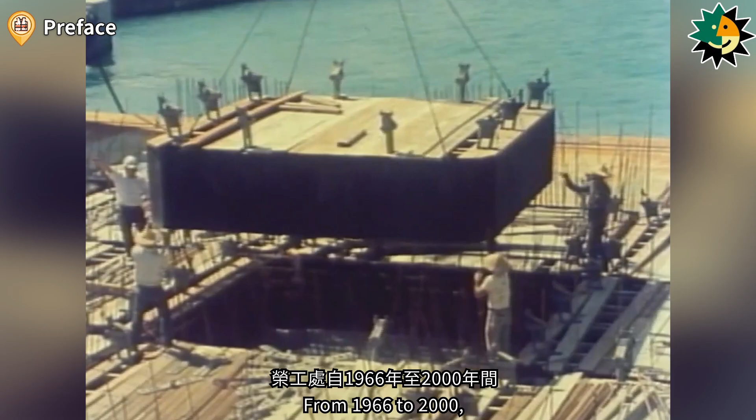From 1966 to 2000, the RSEA engineering agency competed fiercely in the global construction market against contractors from around the world, securing overseas projects across Southeast Asia, Africa, the Middle East, the Americas, the Pacific Islands, and the Indian Ocean region. The previous first episode and the second episode introduced projects in 6 Southeast Asian countries, while the third episode covered projects in the Middle East, specifically in Saudi Arabia, Jordan, and Bahrain.

This is the fourth episode, which continues with the introduction of projects in various regions, including Diego Garcia in the Indian Ocean, Guam in the Pacific Islands, the Central African Republic, Egypt, Liberia, and Guinea-Bissau in Africa, Atlanta and Vancouver in North America, Costa Rica in Central and South America, as well as the Solomon Islands and Tuvalu in the South Pacific.

Guam, located in the western Pacific Ocean, is one of the 5 unincorporated territories of the United States. It has an area of 544 square kilometers and a population of approximately 161,785. From 1970 to 1980, the RSEA Engineering Agency began expanding its operations to Guam, starting with the construction of phases 2 and 3 of the U.S. Naval Base housing project. Other scattered works included housing projects at the U.S. Naval Air Station, facility restoration at the Naval Base, facility restoration at the Air Force Base, and the reconstruction of the Naval Base transmitter building.

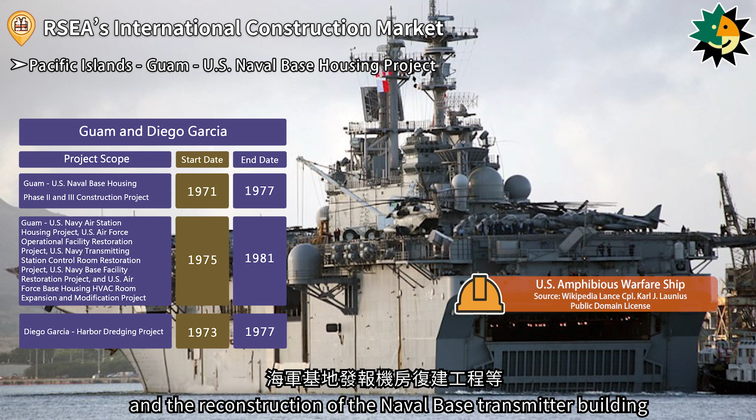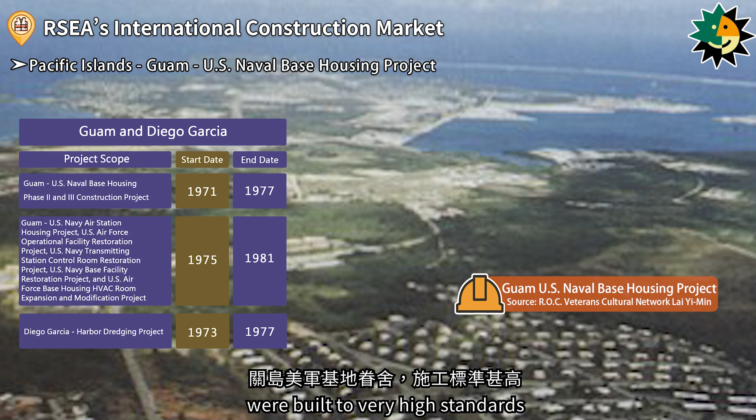The U.S. Naval Base housing project, in its second and third phases, involves the construction of a total of 530 housing units. The family housing units at the U.S. military base in Guam were built to very high standards. Each unit was equipped with central air conditioning, a garage, as well as appliances such as a dishwasher and a garbage disposal. The RSEA Engineering Agency undertook both the design and construction as a turnkey project.

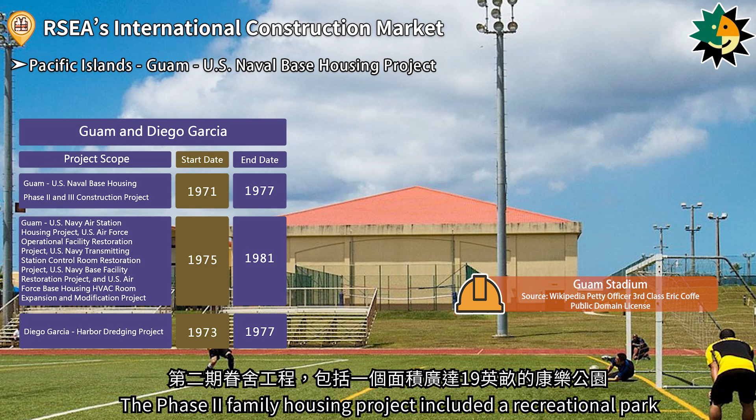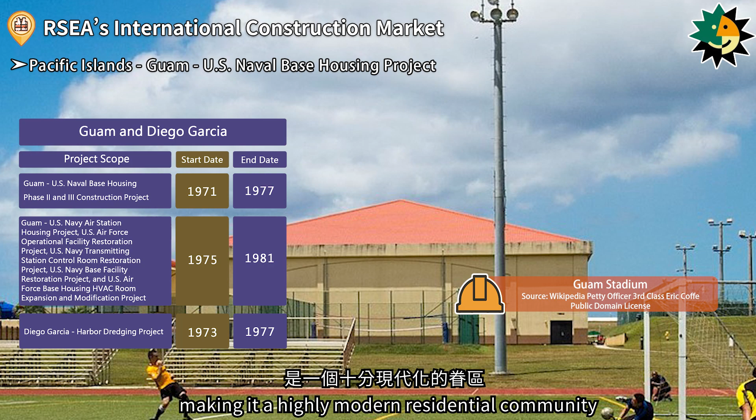The Phase 2 family housing project included a recreational park covering an area of 19 acres. The park featured sports courts, a playground, and picnic areas, making it a highly modern residential community. In addition, the church project in Guam was honored with a Best Design Award. The RSEA Engineering Agency operated in the Guam region for a total of 10 years, but eventually withdrew due to limited business development.

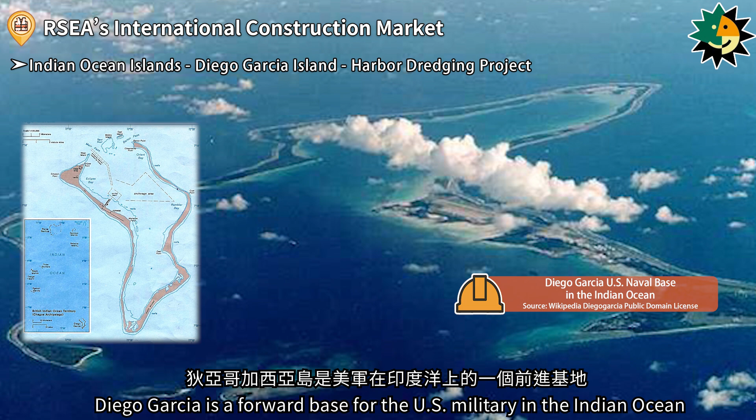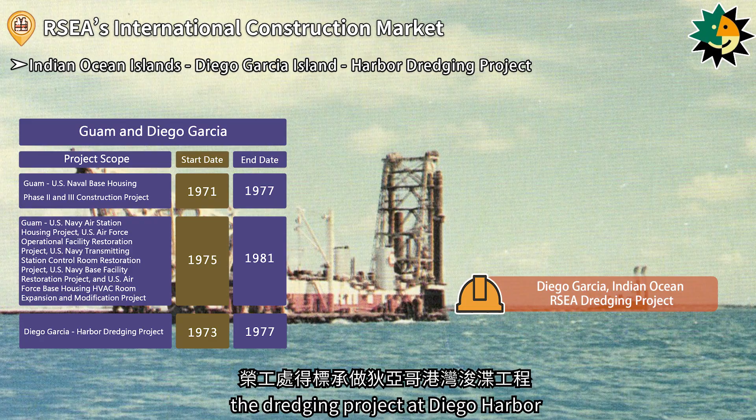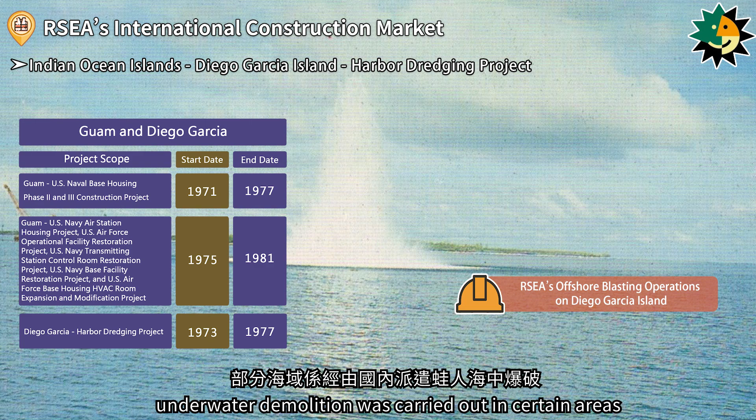Diego Garcia is a forward base for the U.S. military in the Indian Ocean. From 1973 to 1977, the RSEA Engineering Agency was awarded the contract for the dredging project at Diego Harbor. The seabed of Diego Garcia consists entirely of extremely hard coral reefs, making it a nemesis for grab dredgers. During construction, underwater demolition was carried out in certain areas by frogmen dispatched from Taiwan, causing the coral to collapse naturally and achieve the desired dredging effect.

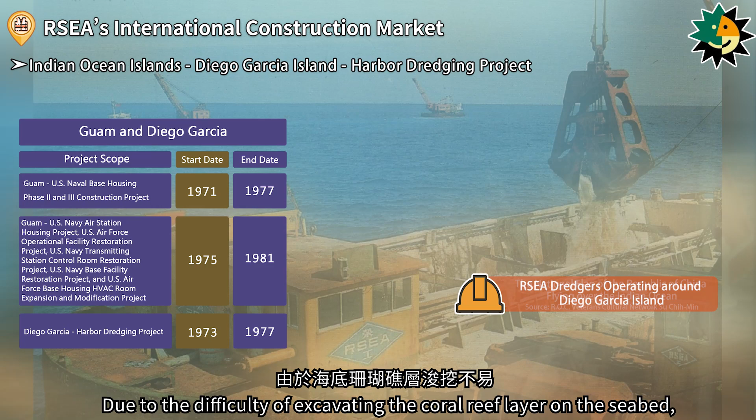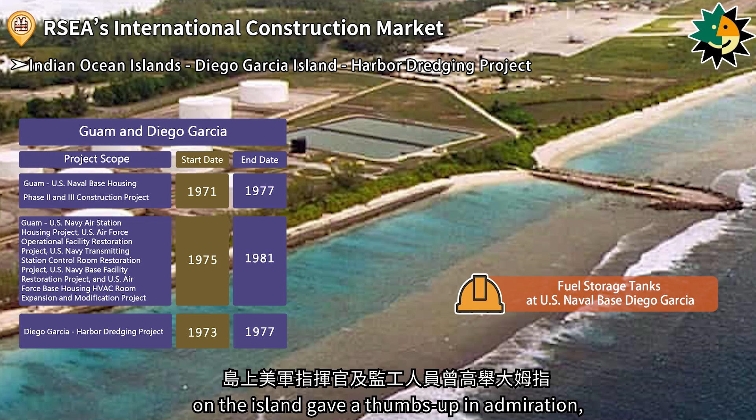The dredging project at Diego Garcia Harbor was carried out in 6 phases. Among them, the first phase was the most challenging due to the difficulty of excavating the coral reef layer on the seabed. The RSEA Engineering Agency's staff persevered under harsh conditions and ultimately completed the project on schedule. When all 6 phases of the project were completed, the U.S. military commanders and supervising personnel on the island gave a thumbs up in admiration, praising the engineering personnel from the Republic of China as truly outstanding.

The Central African Republic lies between 3 and 11 degrees north latitude, situated in the heart of the African continent. It is a vital corridor for north-south and east-west movement, holding significant strategic importance. The country has a total area of 625,900 square kilometers and a population of approximately 4,422,000. To the northeast, it borders Sudan, to the east, South Sudan, to the south, the Democratic Republic of the Congo, to the southwest, the Republic of the Congo, to the west, Cameroon, and to the north, Chad. Located about 1,000 kilometers from the nearest coastline, it is a landlocked country with no access to the sea.

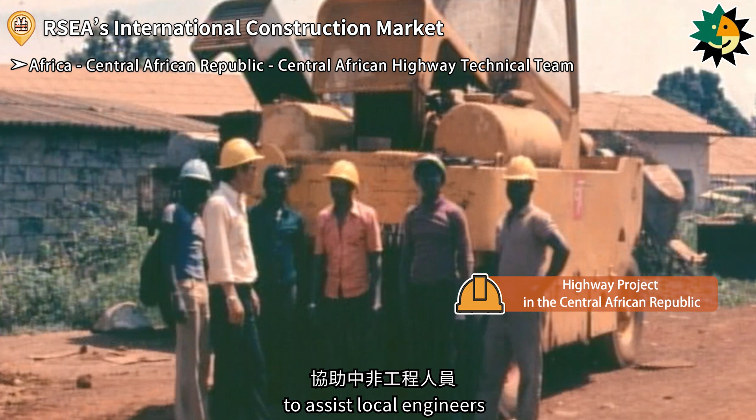In 1970, the RSEA Engineering Agency entered Africa for the first time by dispatching a Central African Highway technical team to assist local engineers in road construction and training. Their work included guiding highway construction operations, assisting in the maintenance and repair of related construction machinery, and training personnel in highway engineering.

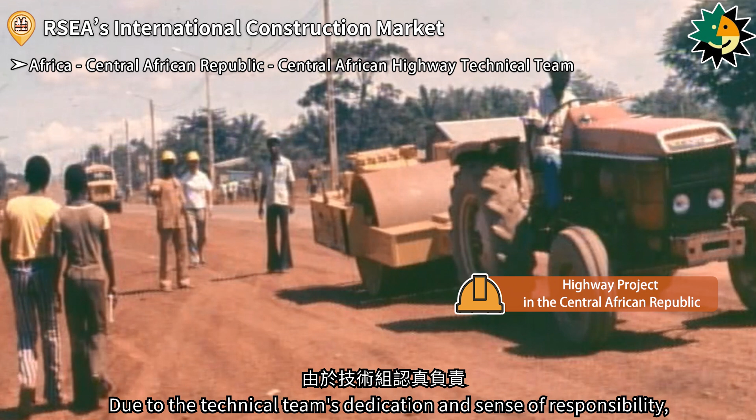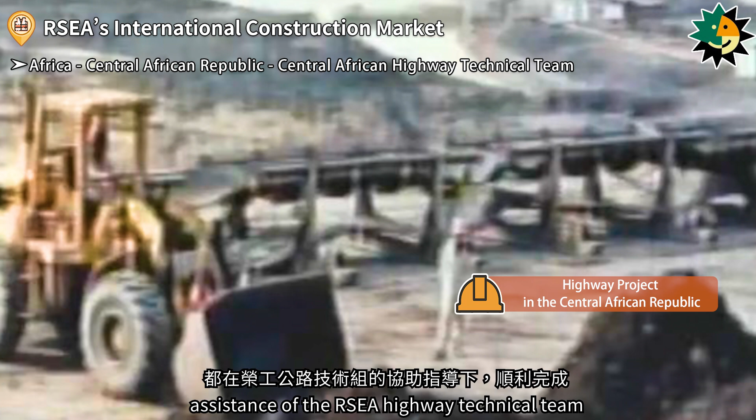Due to the technical team's dedication and sense of responsibility, they were warmly welcomed by the host country. Many road construction projects were successfully completed under the guidance and assistance of the RSEA Engineering Agency Highway Technical Team. The technical team remained in service until 1976, when diplomatic ties between the two countries were severed, prompting their withdrawal. Over 5.5 years of service, the bond of friendship between the two peoples was deeply rooted and endures to this day, thanks to the RSEA Engineering Agency's technical assistance.

The Arab Republic of Egypt is commonly known as Egypt. Ancient Egypt was one of the world's earliest civilizations. The country has a total area of 1,001,450 square kilometers, and as of February 2020, its population surpassed 100 million. Egypt is considered a middle power country, with key industries such as tourism, agriculture, manufacturing, and services contributing almost equally to its development. Egypt's Suez Canal serves as a bridge between Asia and Africa, and it holds significant influence across the Mediterranean, the Middle East, and regions of Islamic faith.

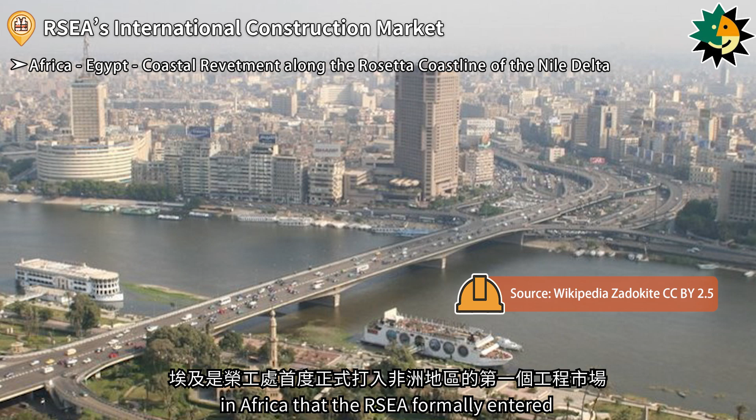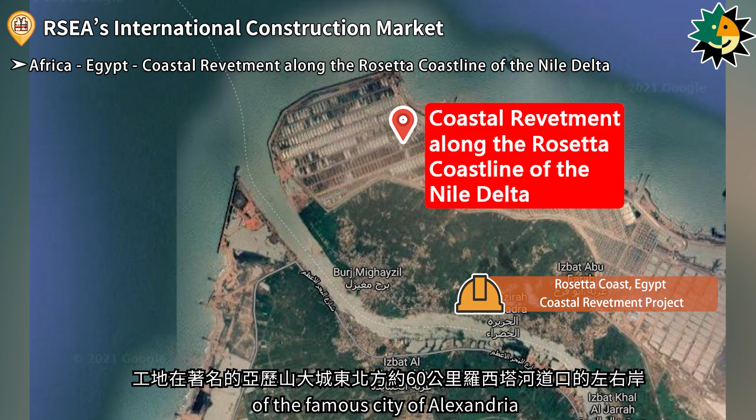Egypt was the first engineering market in Africa that the RSEA Engineering Agency formally entered. In 1986, the RSEA Engineering Agency won the contract to undertake the coastal revetment along the Rosetta coastline of the Nile Delta. The construction site was located on both banks of the Rosetta branch mouth, about 60 kilometers northeast of the famous city of Alexandria. Revetments were built to protect against wave erosion, 1.5 kilometers on the left bank and 3.8 kilometers on the right bank, totaling 5.3 kilometers in length.

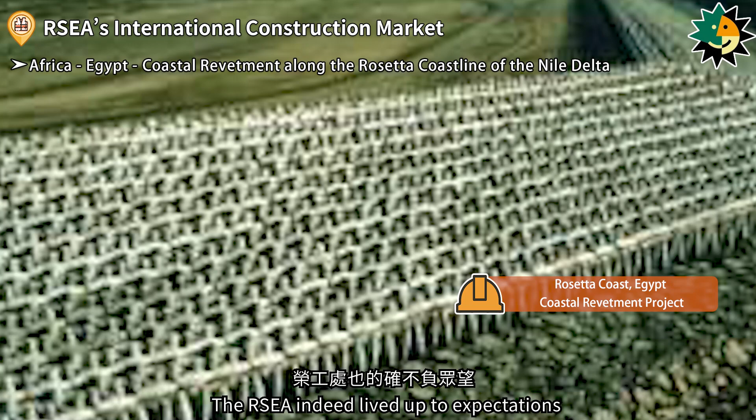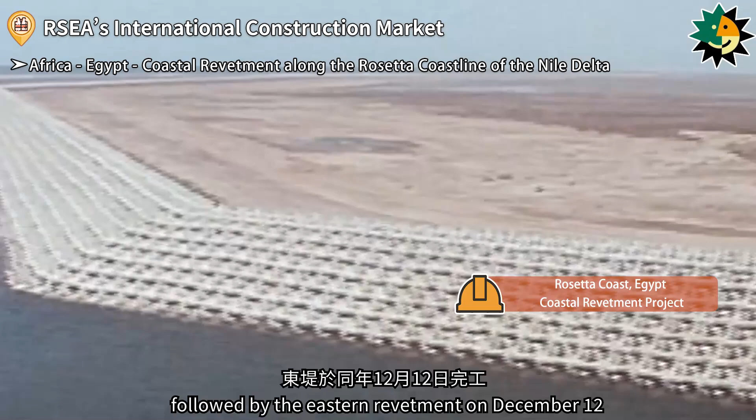After the RSEA Engineering Agency was awarded the contract, the project drew significant attention from international coastal protection experts representing the World Bank, the United Nations, the United States, France, the Netherlands, Denmark, and Egypt. The RSEA Engineering Agency indeed lived up to expectations, not only successfully completing a project that safeguarded the lives, property, and ecological resources of a large portion of the Egyptian population, but also opening a channel of diplomatic engagement between the Republic of China and a country with which it had no formal diplomatic ties, making a significant contribution to citizen diplomacy. The Rosetta Coastal Protection Project officially commenced at the end of March 1986. The western revetment was completed first in September 1990, followed by the eastern revetment on December 12 of the same year, more than 3 months ahead of the contractual schedule.

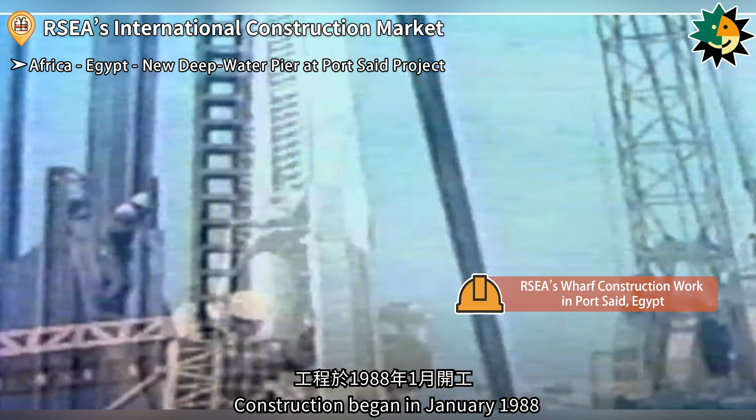In 1987, the RSEA Engineering Agency was subsequently awarded the contract for the construction of a new deep-water pier at Port Said. Located on the western bank of the Suez Canal, Port Said is a commercial port on the Mediterranean coast of Egypt. The project involved the construction of a pile-supported deep-water pier measuring 250 meters in length and 34.5 meters in width. Construction began in January 1988 and was completed on June 3, 1990.

Egypt and Taiwan have no formal diplomatic relations. In 1989, then Kuomintang Secretary General James Soong and his wife visited Egypt. Through arrangements made by the RSEA Engineering Agency, the Egyptian Minister of Public Works privately hosted a banquet in their honor, joined by the Ministers of Agriculture and Interior. The gathering was warm and cordial, with both hosts and guests enjoying the occasion.

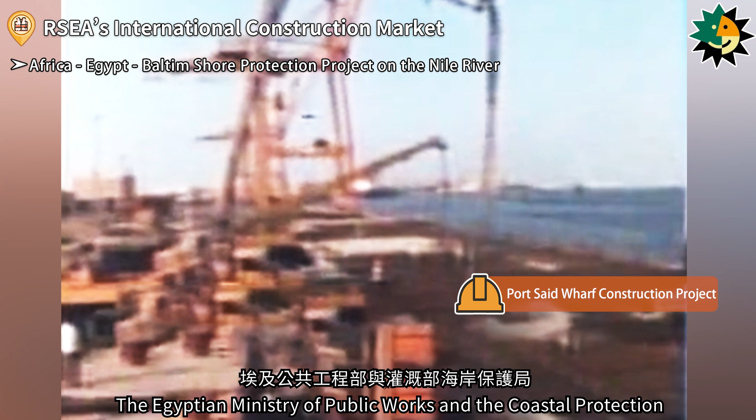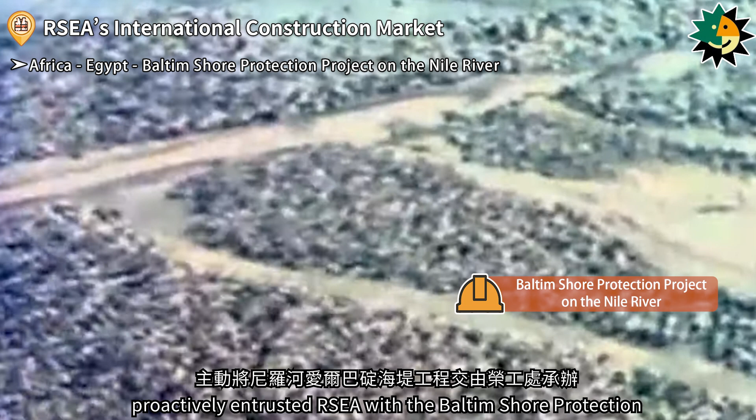The Egyptian Ministry of Public Works and the Coastal Protection Authority under the Ministry of Irrigation, in light of RSEA Engineering Agency's performance on the Rosetta Seawall and Port Said project, proactively entrusted RSEA Engineering Agency with the Baltim Shore Protection Project on the Nile River. This was a contract awarded by the Egyptian government, earned entirely through engineering credibility and a guarantee of quality.

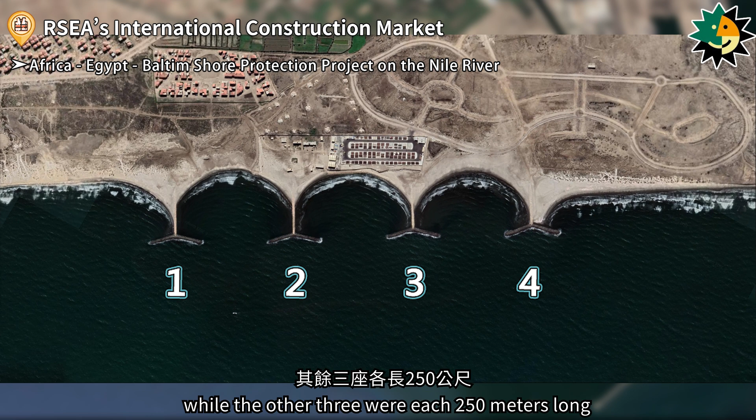The Baltim Shore Protection Project was located in the central area of the Nile River Delta's lower reaches. The construction included a new seawall measuring 1,100 meters in length. Approximately 200 meters offshore, 4 isolated offshore breakwaters were built. One of them was 350 meters long, while the other 3 were each 250 meters long. The base width of each breakwater, including the toe of the slope, was 34 meters, and their height ranged from approximately 4.5 to 5 meters above the seabed.

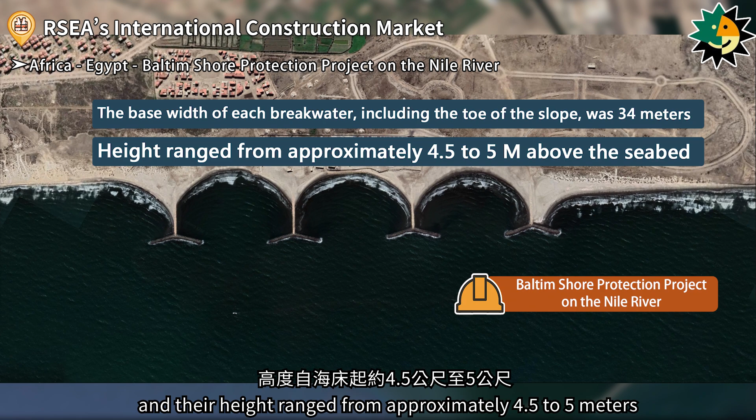The entire project was completed ahead of schedule on May 17, 1993, and the Egyptian government held an inauguration ceremony on August 24 of the same year to officially open the facility. At the time, this was a major event for Egypt, drawing widespread coverage from the news media. The RSEA Engineering Agency, as a trusted and prestigious name, gained widespread recognition across Africa and the international construction industry.

Liberia is located in West Africa, bordering the North Atlantic Ocean. To strengthen relations with Liberia, in particular, assistance was extended in the area of transportation, with a road construction project provided to improve Liberia's infrastructure and agricultural development, thereby revitalizing the country's industries.

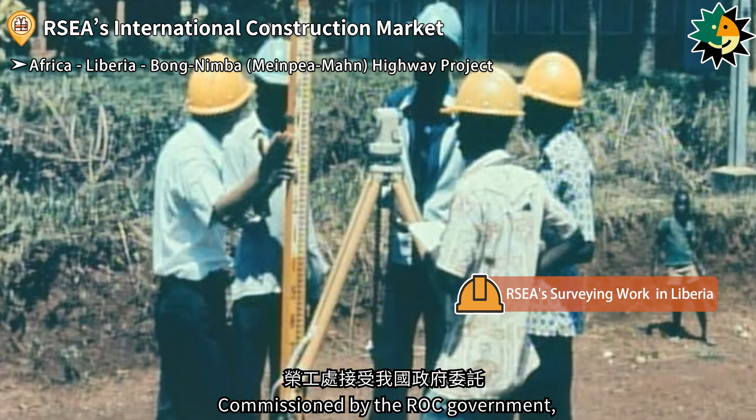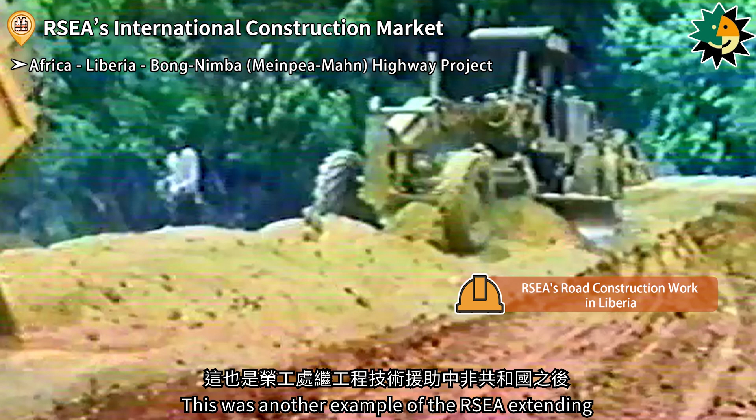The road construction plan provided by the Republic of China was the Bong-Nimba Highway project in Liberia. Commissioned by the ROC government, the RSEA Engineering Agency was entrusted with both the design and construction under a turnkey contract. This was another example of the RSEA Engineering Agency extending friendship and technical assistance to an African nation, following its earlier engineering support to the Central African Republic.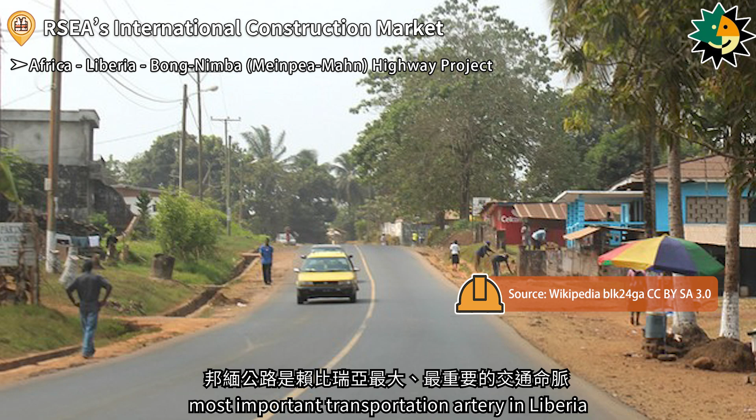The Bong-Nimba Highway is the largest and most important transportation artery in Liberia. Located in the jungle region of central Liberia, it stretches 270 kilometers in length and passes through vast swamps and hilly terrain. The area was plagued by malaria and epidemics, making construction conditions extremely harsh. At the same time, the construction area was home to a complex mix of ethnic groups with hostile relations toward one another, posing significant potential risks to the execution of the project.

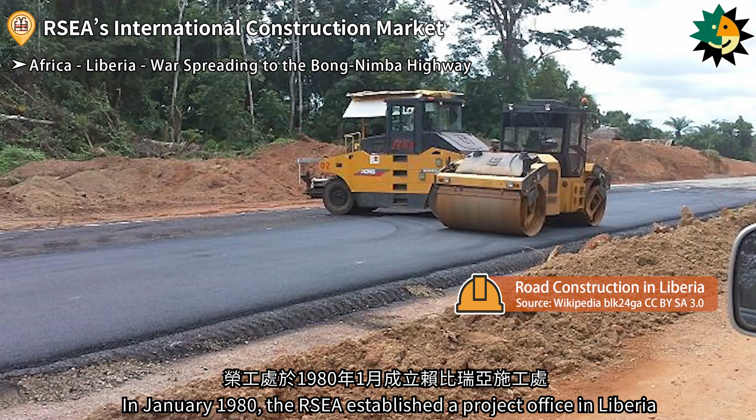In January 1980, the RSEA Engineering Agency established a project office in Liberia and dispatched a site director along with 6 colleagues to the country by air. Filipino engineers and local laborers were recruited to commence construction of the Bong-Nimba Highway.

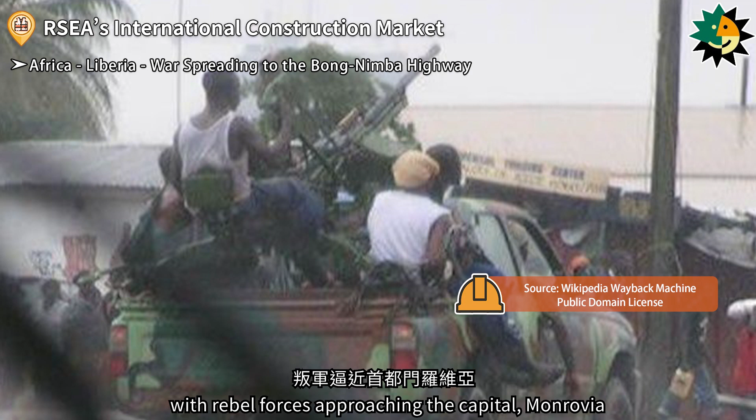However, an armed rebellion broke out in Liberia, and the conflict quickly spread along the Bong-Nimba Highway corridor. By the end of April 1980, the civil war had rapidly escalated, with rebel forces approaching the capital, Monrovia. After multiple coordination efforts by the construction office, all construction personnel finally boarded a flight with staff from our embassy in May and returned from Monrovia to await further instructions in Taiwan.

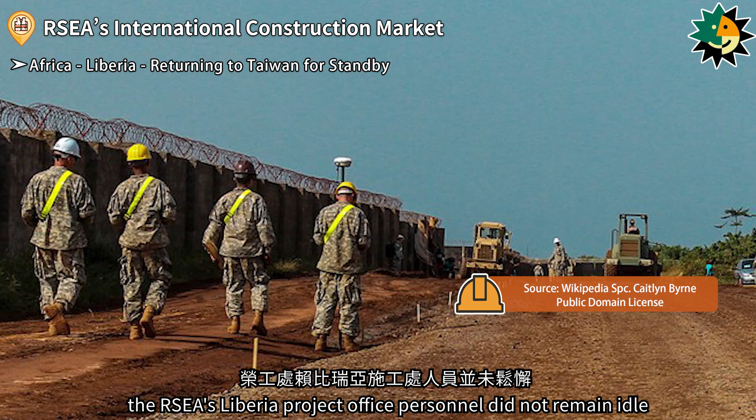While awaiting the resumption of work in Taiwan, the RSEA Engineering Agency's Liberia Project Office personnel did not remain idle. They input engineering data collected earlier that year at the Bong-Nimba site into the computer system, rushed to produce topographic maps, and proceeded with highway design work.

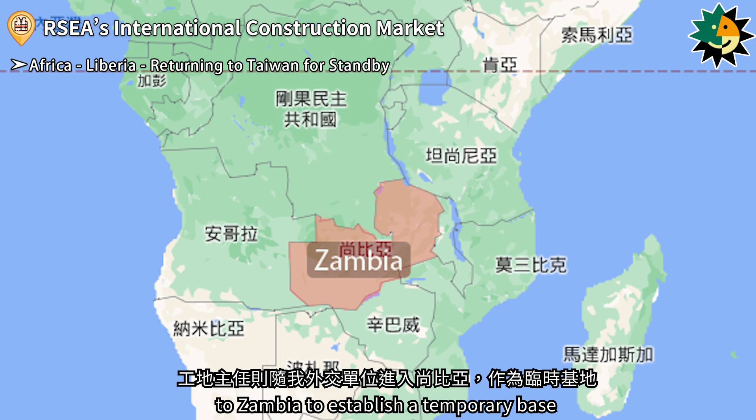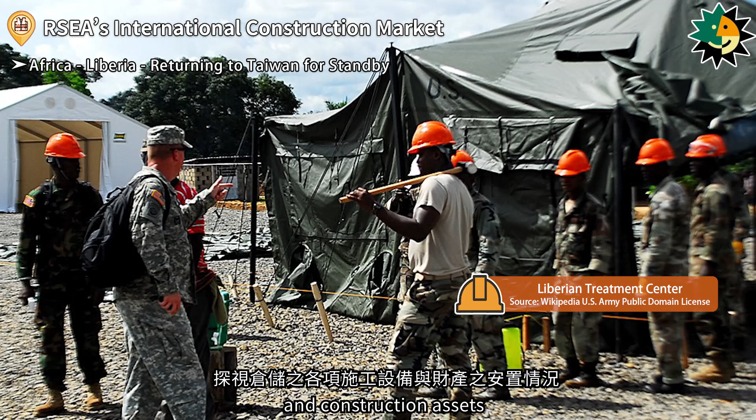The site director accompanied our diplomats to Zambia to establish a temporary base. He risked returning to Liberia multiple times to assess the civil war situation there, and inspect the storage and placement of equipment and construction assets. He kept in close contact with our embassy to prepare for the possible resumption of work. As the conflict worsened and warlords remained in deadlock, it was concluded that work could not resume soon. The Bong-Nimba Highway project ended in November 1992.

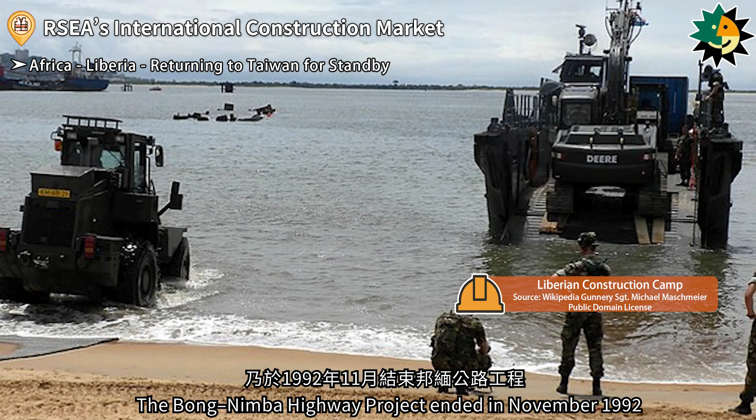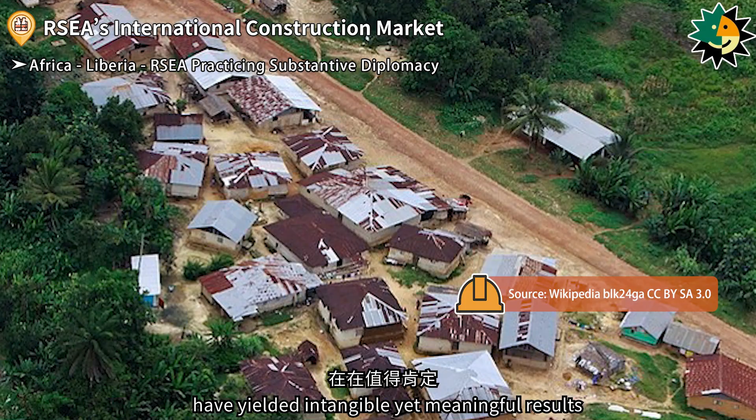Although the Bong-Nimba Highway project was interrupted due to the civil war in Liberia, the RSEA Engineering Agency's cooperation with the Ministry of Foreign Affairs in implementing substantive diplomacy, its planning of foreign aid policies, and its efforts to assist friendly nations have yielded intangible yet meaningful results, efforts that are truly worthy of recognition.

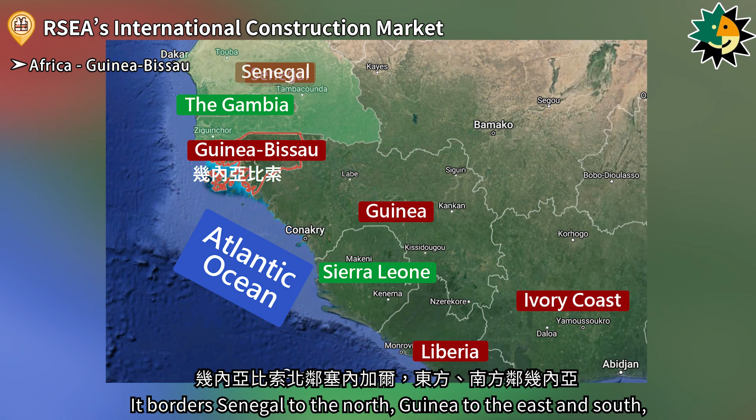The Republic of Guinea-Bissau, commonly known as Guinea-Bissau, is a country located in West Africa, formerly known as Portuguese Guinea. It borders Senegal to the north, Guinea to the east and south, and the Atlantic Ocean to the west. It has a total area of 36,120 square kilometers and a population of approximately 1.6 million. Its capital is Bissau. Guinea-Bissau is one of the least developed countries in the world.

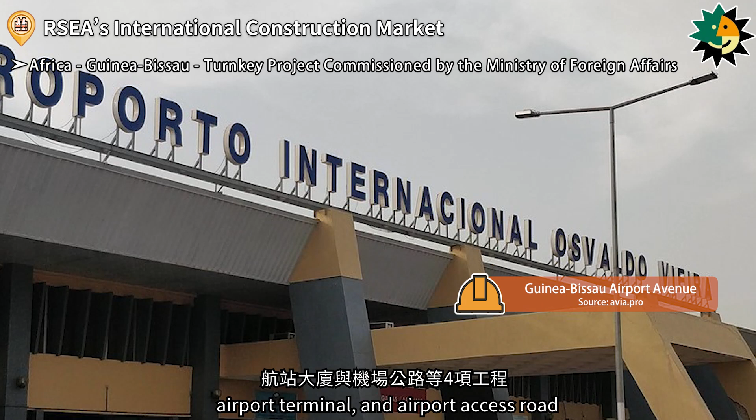Commissioned by the Ministry of Foreign Affairs, the RSEA Engineering Agency undertook 4 turnkey projects: public housing, Parliament House, Airport Terminal, and Airport Access Road. All project funds were provided via loans from the ROC to Guinea-Bissau. The RSEA Engineering Agency followed the loan agreements and memoranda signed by both nations, submitted the proposal on June 25, 1991, and signed the contract on July 12, 1991. These were the largest projects in the nation's history, and received wide media coverage locally.

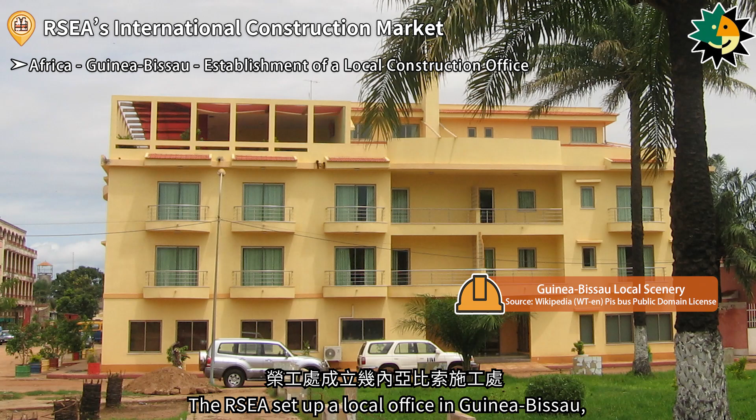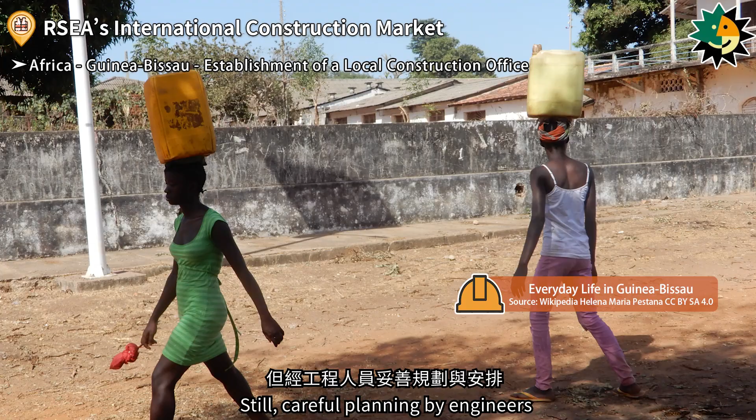The RSEA Engineering Agency set up a local office in Guinea-Bissau, assigning staff who had returned from war-torn Liberia. With material shortages, poor infrastructure, and language barriers due to Portuguese use, mobilization proved extremely difficult. Still, careful planning by engineers allowed steady project execution. Resources in Guinea-Bissau were extremely limited; even small items like nails and screws had to be imported from abroad. As for construction materials such as hollow bricks, the RSEA Engineering Agency had to establish its own plant to manufacture them locally.

The construction personnel dispatched by the RSEA Engineering Agency had previously experienced the turmoil of civil war in Liberia, which enabled them to face the harsh conditions in Guinea-Bissau without fear. In February 1993, although the construction personnel were attacked and robbed by rioters, resulting in injuries to several staff members, the determination of the RSEA Engineering Agency workers to complete the project remained unshaken.

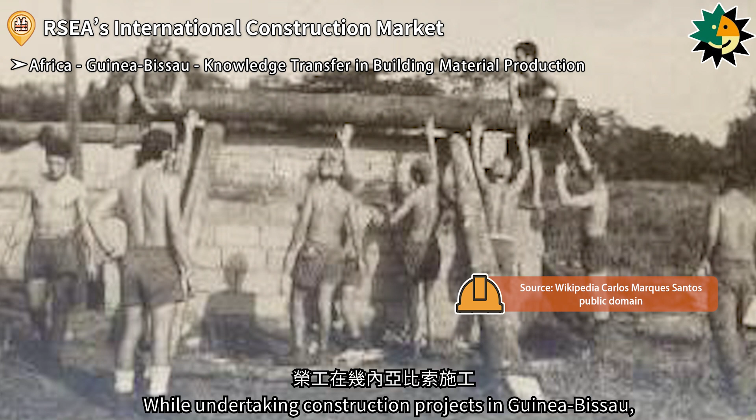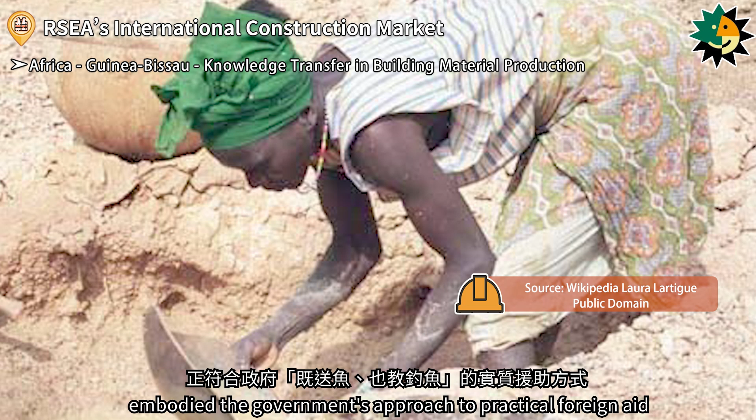While undertaking construction projects in Guinea-Bissau, the RSEA Engineering Agency also trained local workers in the production of crushed stone aggregates and concrete blocks to supply the needs of various construction sites. This transfer of technical skills embodied the government's approach to practical foreign aid, not only giving fish, but also teaching how to fish.

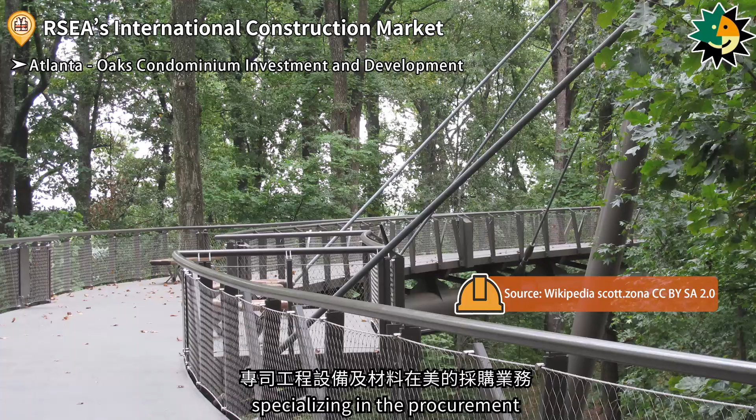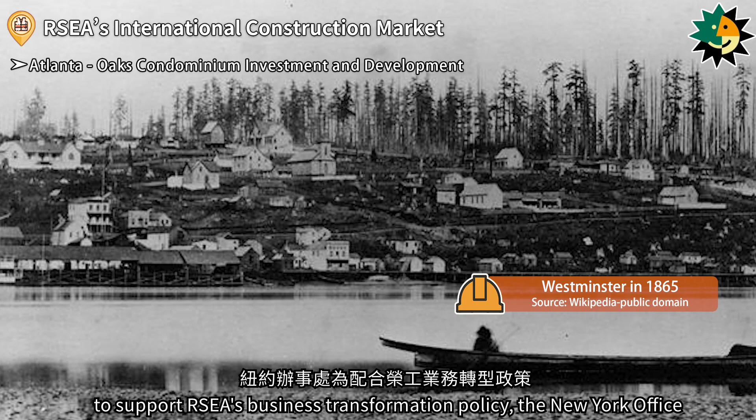The RSEA Engineering Agency's New York office was established in 1977, specializing in the procurement of engineering equipment and materials in the United States. In the late 1980s, to support RSEA Engineering Agency's business transformation policy, the New York office began seeking real estate development opportunities in the United States and Canada.

In 1990, the RSEA Engineering Agency decided to move into the Oaks at Buckhead Building Investment and Development Project in Atlanta, Georgia. Founded in 1837, Atlanta quickly became a major transportation hub in the southern United States. After the defeat of the Confederacy during the American Civil War, the city was nearly destroyed, but it recovered rapidly during the Reconstruction era. In the 20th century, it emerged as a center of the American Civil Rights Movement and went on to host the Centennial Olympic Games in 1996.

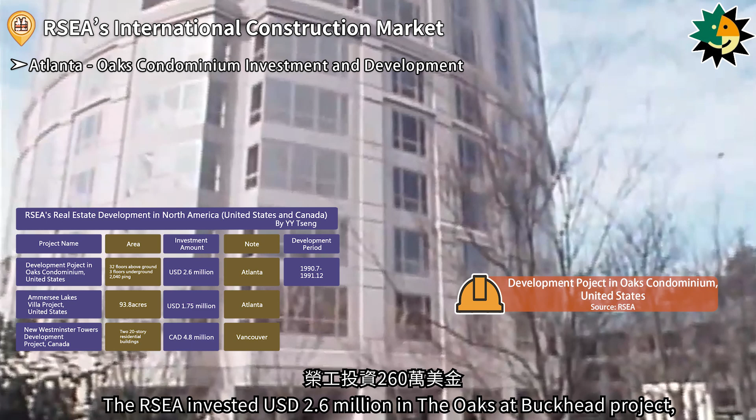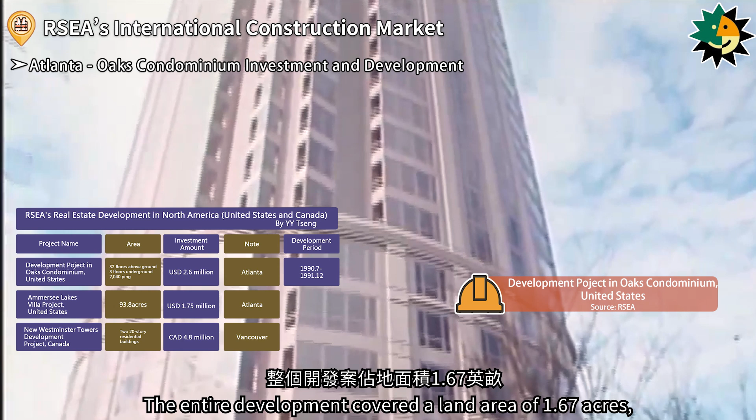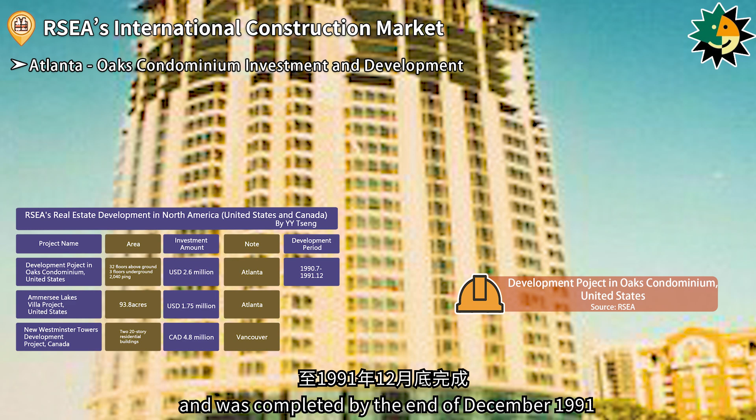The RSEA Engineering Agency invested $2.6 million in the Oaks at Buckhead project, while additional funding for land and construction costs was covered through bank loans. The project consisted of a high-rise building with 32 floors above ground and 3 basement levels. The entire development covered a land area of 1.67 acres, with a total floor area of 2,040 pings. Construction began in July 1990 and was completed by the end of December 1991. The development comprised a total of 216 residential units, all of which were sold by the end of July 1996.

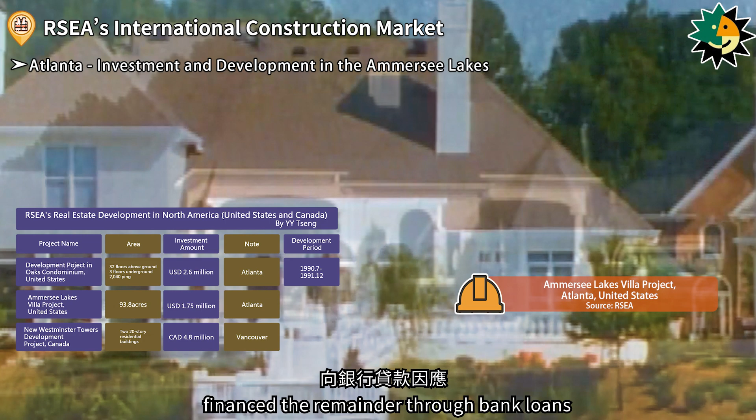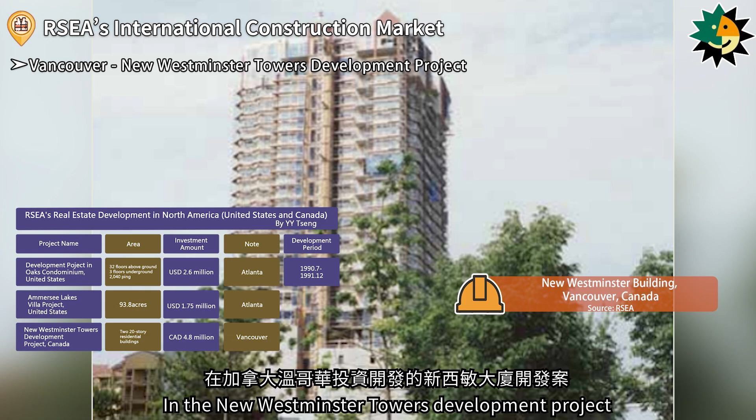In another investment and development project in the Ammersee Lakes area of Atlanta, the RSEA Engineering Agency invested $1.75 million and financed the remainder through bank loans. The development covered 93.8 acres of land, and by the end of 2000, a total of 153 units had been completed and fully sold. In the New Westminster Towers development project in Vancouver, Canada, the RSEA Engineering Agency invested $4.8 million Canadian dollars to construct 2 residential buildings, each over 20 stories high. By the end of May 2000, all units had been sold.

Costa Rica, meaning rich coast, is a country in Central America. It borders Nicaragua to the north and Panama to the south, and is flanked by the Pacific Ocean and the Caribbean Sea to the west and east, respectively. The country has a land area of 51,100 square kilometers and a population of approximately 4.6 million. The capital is San Jose, and the country is a democratic republic with a strong system of constitutional checks and balances. The president serves as the head of state.

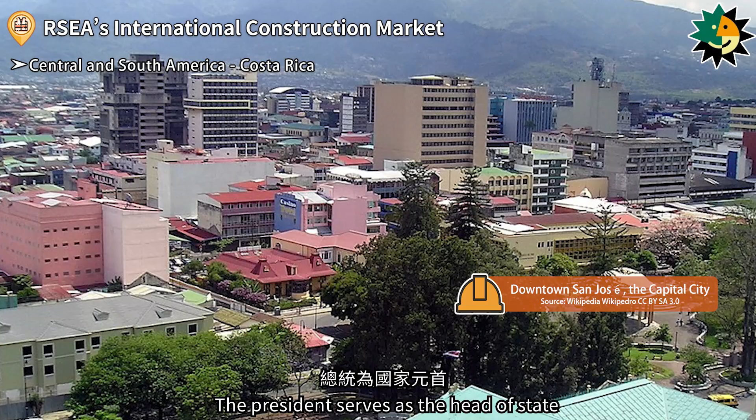Costa Rica is the first country in the world to have abolished its military. It is one of the more economically developed countries in Central America and enjoys a relatively high standard of living. In addition, Costa Rica places great emphasis on ecological conservation and is home to numerous nature reserves. It is a country that operates entirely on sustainably generated electricity, and its transportation systems are primarily powered by renewable energy sources.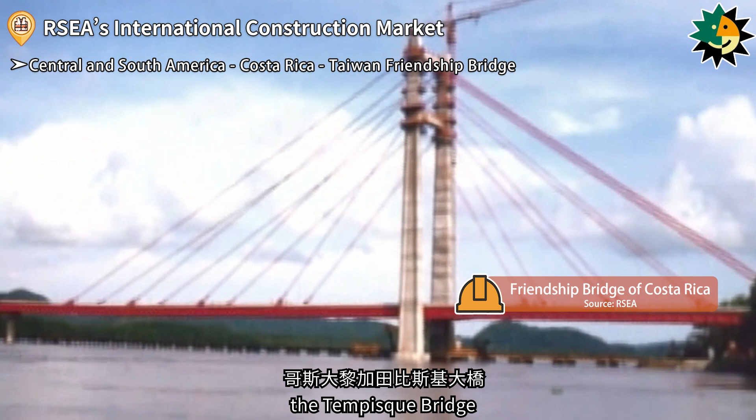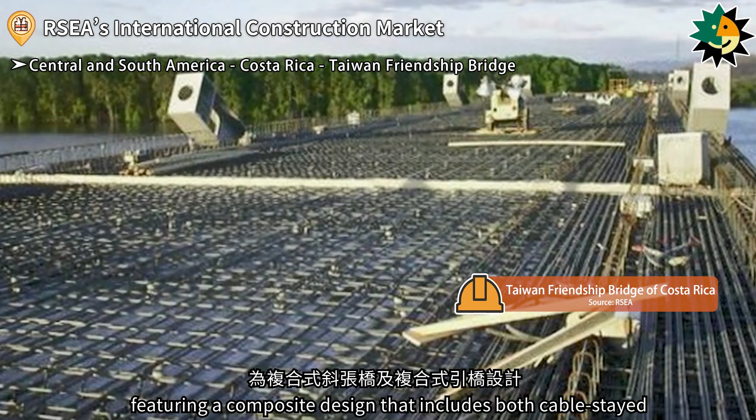In 2000, RSEA Engineering Agency went to Costa Rica in Central America to undertake a foreign aid project commissioned by the Ministry of Foreign Affairs of the Republic of China, the Tempisque Bridge. It was the first cable-stayed bridge in Central and South America. The bridge is 780 meters long and 13.3 meters wide, featuring a composite design that includes both cable-stayed and approach bridge structures, with a main span of 170 meters. This project was carried out as a turnkey contract. The design work was undertaken by MAA, Taiwan. Construction began in July 2000 and was completed in March 2003. The bridge was named the Taiwan Friendship Bridge.

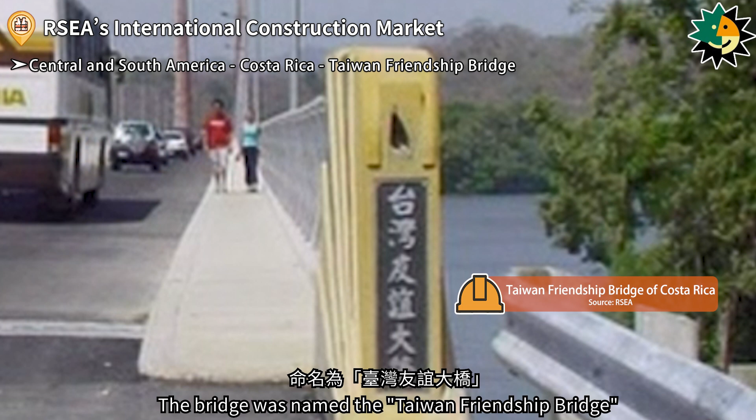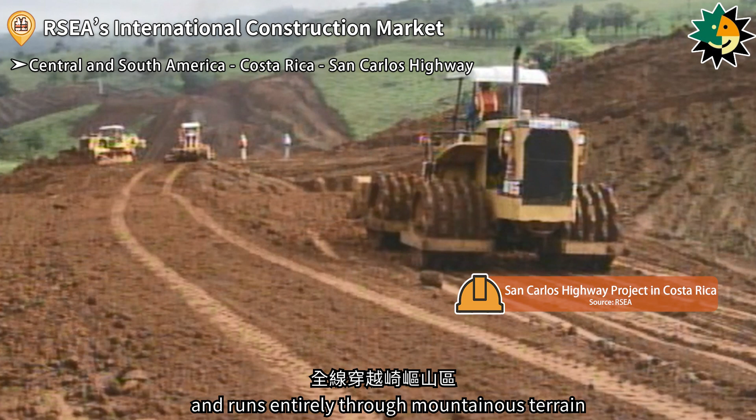The RSEA Engineering Agency later secured the San Carlos Highway project in Costa Rica through competitive bidding, with a construction period of 6 years. The highway has a total length of 39.4 kilometers and runs entirely through mountainous terrain. 10 river bridges were constructed. For this project in Costa Rica, the RSEA Engineering Agency sourced most of the construction materials from Taiwan. In this way, a large portion of the project funding was able to flow back to Taiwan, marking a new model for the country's foreign aid projects. Construction began in 2003 and was completed in 2009.

The Solomon Islands is a nation in the South Pacific, located northeast of Australia and east of Papua New Guinea. Its capital, Honiara, is situated on Guadalcanal Island, which was a turning point in the Pacific theater during World War II. The Solomon Islands consist of over 990 islands, with a total land area of 28,450 square kilometers and a population of 640,000.

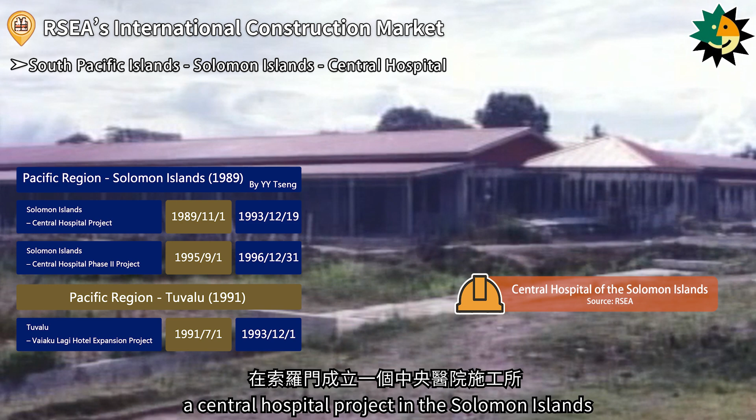In 1989, under the arrangement of the Ministry of Foreign Affairs of the Republic of China, the RSEA Engineering Agency established a construction office for a central hospital project in the Solomon Islands. Preliminary site preparation officially began on November 1, 1989.

Phase 1 of the project included the completion of the outpatient department, emergency room, physical therapy department, operating room, X-ray room, maternity ward, laboratory, pharmacy, sterilization room, mechanical and electrical room, conference room, lounge, storage room, and restrooms. The facility was officially handed over to the government of the Solomon Islands on December 19, 1993. The opening ceremony was presided over by Prime Minister Solomon Mamaloni.

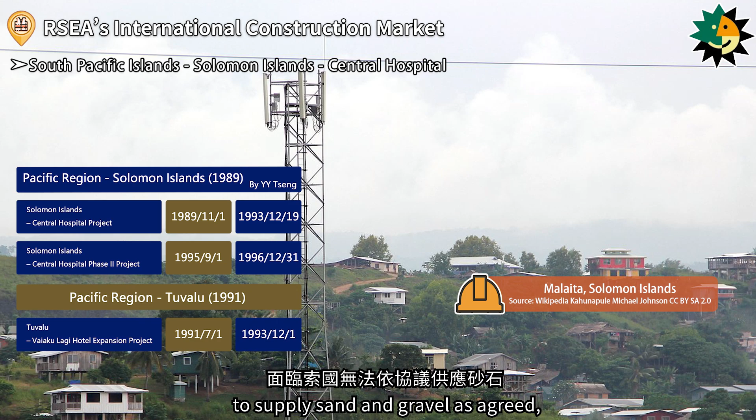At the beginning of the project, several challenges arose, including the Solomon Islands' inability to supply sand and gravel as agreed, a general lack of professionalism, and a shortage of skilled construction workers. Fortunately, the RSEA Engineering Agency team overcame these difficulties through strong teamwork.

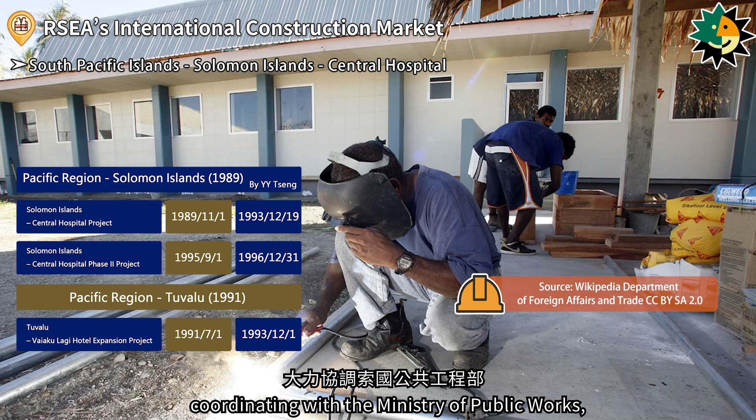On one hand, materials were procured from Taiwan and delivered on time in 20-foot containers. On the other hand, the Embassy of the Republic of China in the Solomon Islands actively participated in the project, coordinating with the Ministry of Public Works, the Port Authority, and Customs to significantly reduce processing time.

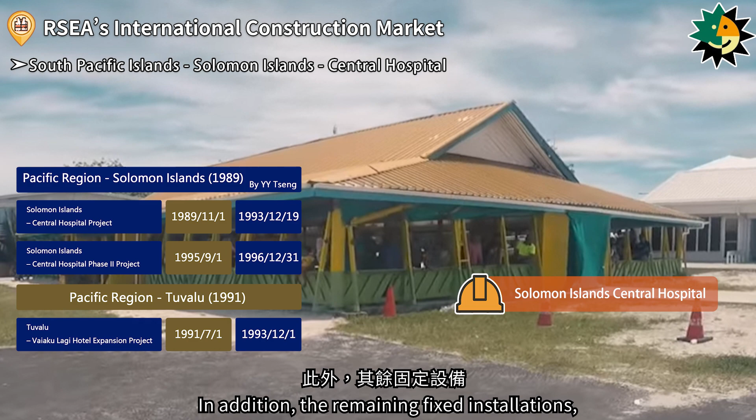Subsequently, the Ministry of Foreign Affairs of the Republic of China agreed to the Solomon Islands' request and donated medical equipment and instruments to the hospital. In addition, the remaining fixed installations, a small-scale wastewater treatment plant, and solar water heaters were also added to the project and entrusted to the RSEA Engineering Agency for construction.

Phase 2 of the Solomon Islands Central Hospital project began in September 1995 and was completed in December 1996.

Tuvalu is an island nation composed of 9 atoll islands located in the South Pacific. With extremely low elevation, its highest point reaching only 4 meters above sea level, it is one of the countries most severely threatened by global sea level rise.

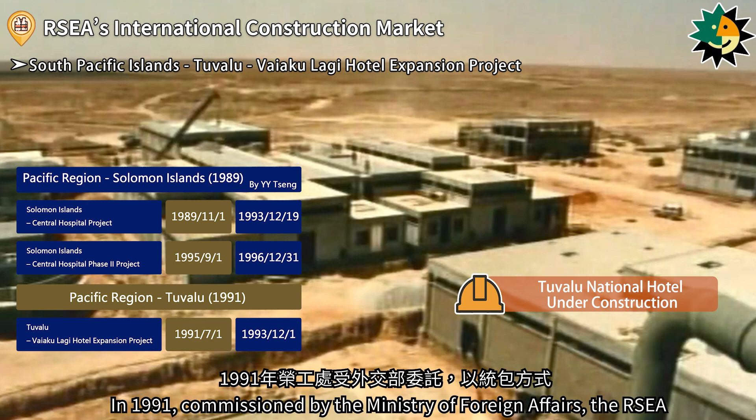Tuvalu has a very small land area, with only 26 square kilometers of territory and a total population of around 10,000. Tuvalu is one of the least developed countries in the world and also one of the least visited by tourists globally. In 1991, commissioned by the Ministry of Foreign Affairs, the RSEA Engineering Agency undertook the Vaiaku Lagi Hotel expansion project in Tuvalu under a turnkey contract.

Construction began in July 1991 and, after more than 2 years, was completed in the winter of 1993. The facility was then handed over to the Tuvaluan government for operation.

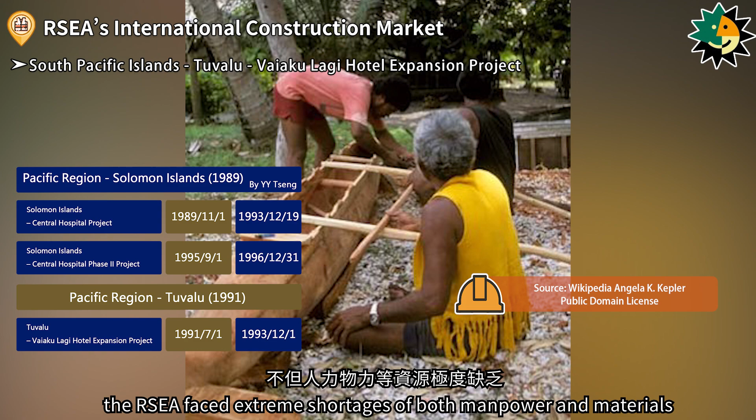During the construction period in Tuvalu, the RSEA Engineering Agency faced extreme shortages of both manpower and materials. Even basic necessities such as fruit, vegetables, clean drinking water, and medical supplies were difficult to obtain through regular resupply. Nevertheless, the construction personnel endured the hardships, overcame the difficulties, and successfully completed the mission.

Looking back, since the RSEA Engineering Agency first entered the international market from Vietnam in 1966, its footprint has reached every corner of the world where construction projects exist. For over 30 years, RSEA Engineering Agency personnel have stood together through wind and rain, undaunted by hardship, and have even accomplished numerous seemingly impossible tasks amidst gunfire and warfare.

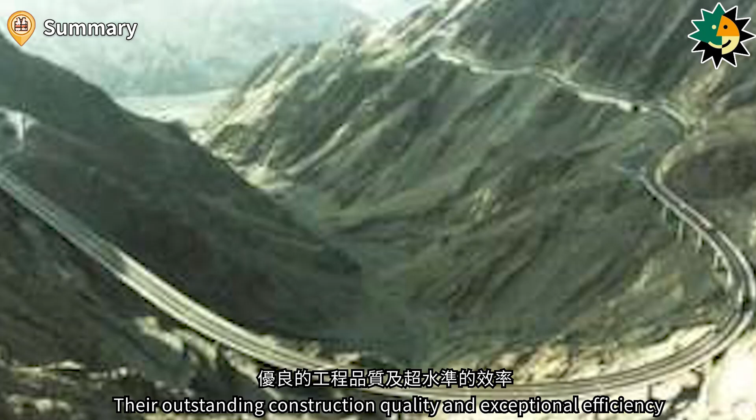Their outstanding construction quality and exceptional efficiency have earned widespread recognition and praise from all levels across many countries. This strong reputation has enabled the RSEA Engineering Agency name to rise to international prominence amid fierce global competition in the construction industry. In every corner of the world, RSEA Engineering Agency's dedicated personnel have completed major national construction projects

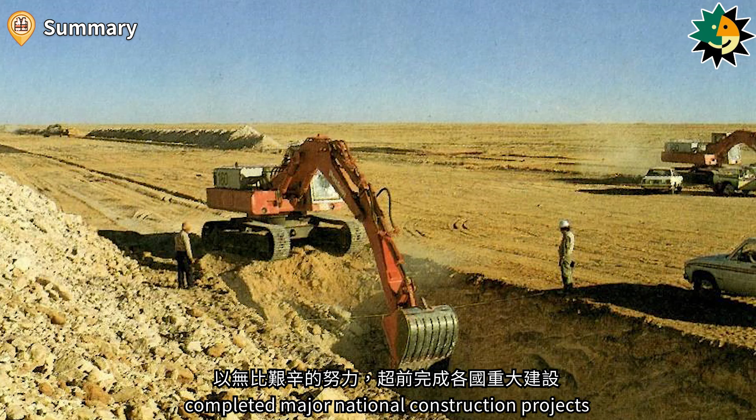ahead of schedule through extraordinary effort and perseverance. Their accomplishments span countless international projects and have also played a vital role in promoting Taiwan's image through citizen diplomacy. The achievements of the RSEA Engineering Agency are truly unprecedented, an enduring source of pride for Taiwan. Let us once again extend our highest respect and deepest gratitude to all RSEA Engineering Agency personnel.